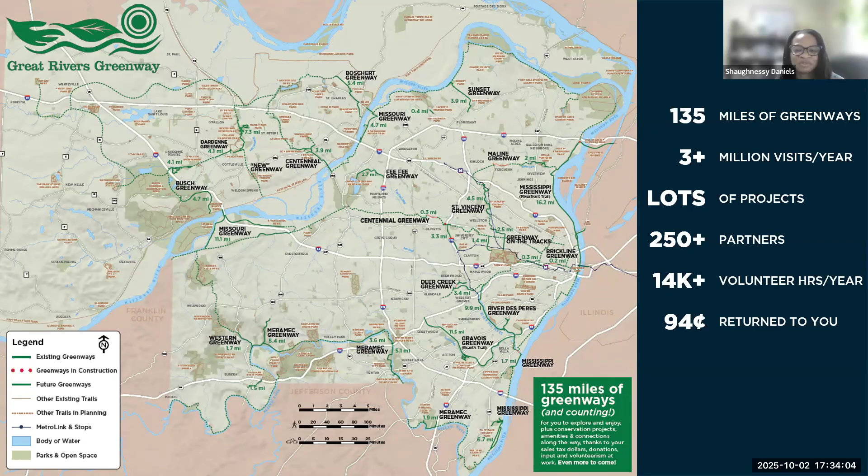This regional network includes 3 counties: St. Louis City, St. Louis County, and St. Charles County. We have 19 active greenways, including the Hodiamont Greenway, which we will just claim that now, and more than 135 miles of trails to explore in the 3-county region.

About the Hodiamont Tracks: it spans 3.5 miles, intersects 7 St. Louis City neighborhoods and 3 wards, including wards 10, 11, and 12. Once built, the Hodiamont Greenway will connect 2 other greenways. They'll connect with the St. Vincent Greenway, which currently travels through the Ruth Porter Mall, and the Brickline Greenway, which is coming soon, which will be built along Spring Avenue, where the Hodiamont Greenway will terminate on the east end.

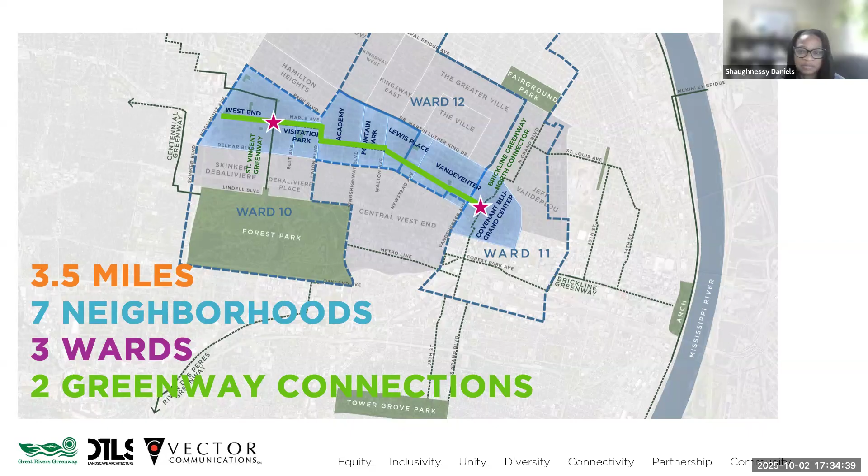And this is your project team for this planning effort. The project team includes Kuleya Bruce, the lead project manager for Great Rivers Greenway. Kuleya is supported by Gil Thomas, who is also a project manager for GRG. I serve as the civic engagement manager for this project. We are fortunate to work with DTLS's Matt Snelling, who's the design lead, as well as an elite team of engagement professionals, Darby Latham and James White.

And we are the team spearheading this effort. Together, we're the group working to make certain that we have the opportunity to come to you tonight and at all of our activities to make sure you're involved. You'll likely see us out and about in the neighborhood from time to time as we continue to work on plans for the Hodiamont Greenway and engage the community around this project. So if you see any of us, be sure to say hey.

A little context and history about the Hodiamont Tracks and how this project came to be. The Hodiamont Tracks have been an important transportation corridor between St. Louis and Florissant, used in many ways since the 1850s. It was the first path for horse-drawn transportation until the late 1880s, when it became a cable car line. It eventually evolved into an electric streetcar line, which operated for more than 70 years, and this was the last streetcar line service in St. Louis City. In the mid-1960s, the corridor was used as a bus line, operated by Bi-State for Metro bus service until 2009.

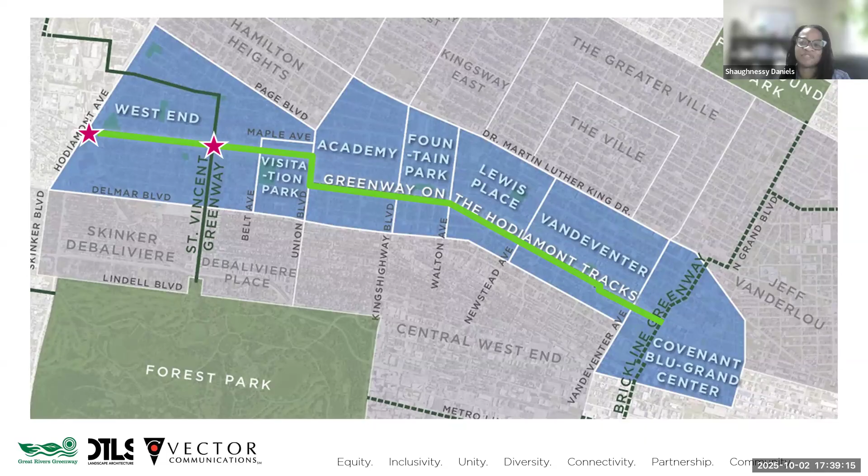We have 2 phases that are currently underway. Those phases include this first phase, Gwen Giles Park at Hodiamont Ave in the West End neighborhood. Design for this project was completed this spring and will go into construction this fall. But to share more about this segment, I'm going to turn the presentation over to Project Manager Kuleya Bruce.

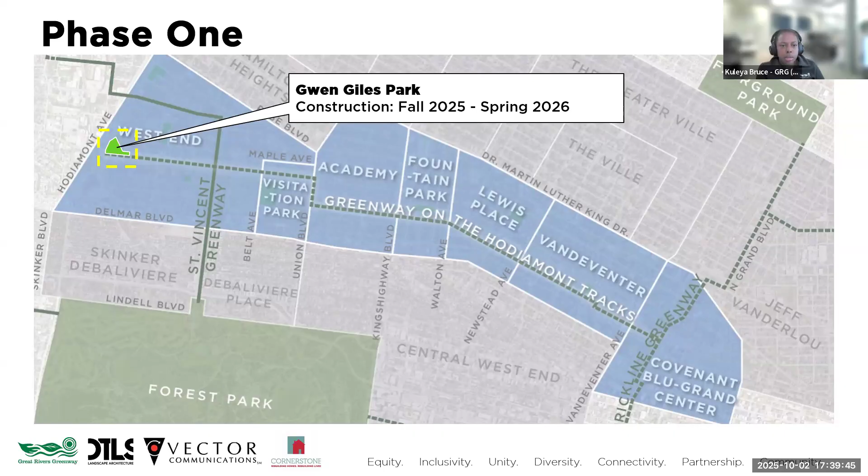So the first phase that will be constructed is the segment at Gwen Giles Park, which is at the intersection of Hodiamont Avenue and the Hodiamont tracks. You see here on the screen a bit of what improvements we will be making to the park. We are starting here because the city is also doing a cycle track along Hodiamont Avenue, and it'll be on the west side, or the north side, depending on where you are on the street.

So we're going to connect to that cycle track. That was a big component of why we wanted to start here. The other reason is because this is a city-owned park. When GRG builds and designs greenways, we typically try to operate in the right of way, but here it's municipality owned property. The park is owned by the city, which gives us the rights to modify and develop that land.

As you can see here, some of the improvements include a designed crossing for pedestrian and trail users to connect to the cycle track. We worked with Alderperson Shameem to install stop signs at this intersection. We understood from the community that there is some higher speed traffic in this area, so we've been working with the community and the Alderperson to install those stop signs.

Within the design, DTLS is also the designer on this phase. They've included some parking in this area, some low plantings, and signage. We were able to work with Cornerstone CDC, who acquired a grant for this segment, and we were able to add a pavilion. Some of the other amenities include a bike fix-it station, drinking fountain, and bottle fill station.

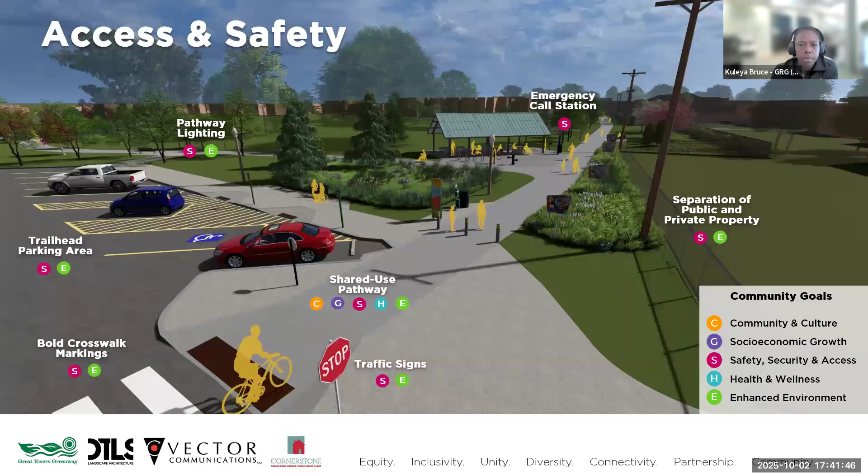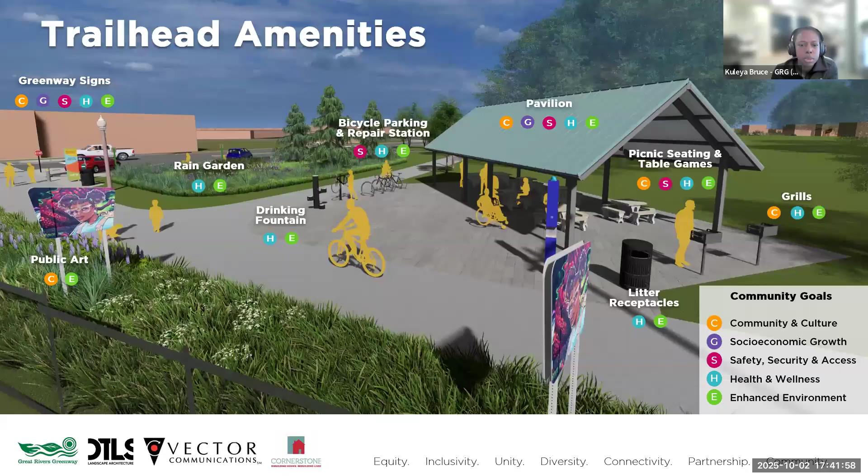We were also fortunate enough on this segment to incorporate a little bit of art and color, so those panels you see have some graphic art on them. In addition to the pavilion, we're going to be working with the St. Louis Chess Club in Central West End. They're going to provide tables with chess boards on them, donating those, and they'll also help program the space, teaching chess in this location.

We'll also have waste receptacles. We're working with the Parks Department to incorporate a couple of grills, and you can see there are also some bike parking areas.

The last thing I wanted to mention is that there's already an existing cycle walking path that goes around the park, and we will be enhancing that so that it's unified and connected to the Greenway.

I'm just going to go back real quickly and see if I can—oh, if you stop there, actually, yeah.

I know I've had a couple questions about this because during our design process we discovered that there was an area just to the south of the Hodiamont tracks that is actually owned by the city. We worked with city forestry to remove, yes, right there where Shaughnessy is showing her cursor, we worked with the city forestry department to get rid of the fence that separated that area. It had gotten overgrown because I don't think some people realized whose responsibility it was to take care of. So we will actually be expanding the park into that area, and that'll now be incorporated into the park. So we did clear that out.

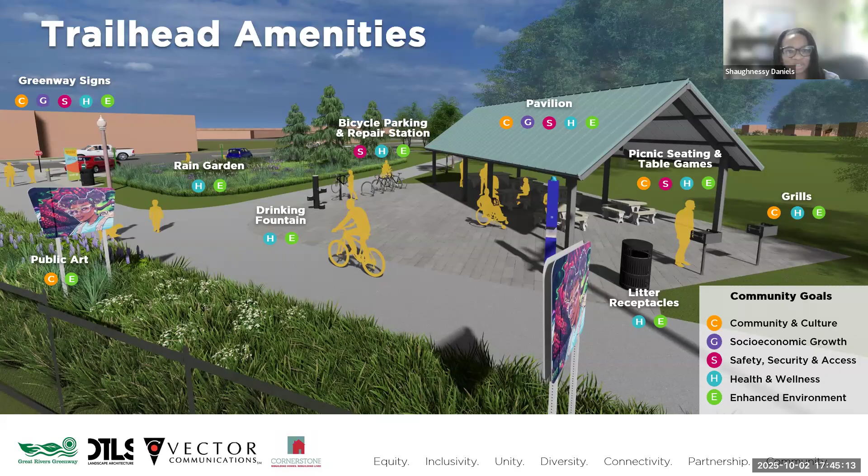One quick note about the art shown here: these are placeholders, so there will be other actual art developed. As Kuleya said, it's definitely something incorporated into the project, and we'll be working on a process to identify what the art is and who the artist is.

I wanted to add one more thing. I didn't speak to the colored dots you see in a lot of these images. As Shaughnessy mentioned, everything we do is to make sure we're listening and responding to your comments and feedback. Early on, going back in the engagement life cycle, we did some engagement and understood the priorities of the community, and that's what those dots represent: those community goals - community and culture, socioeconomic growth, safety, security, access, health and wellness, and enhanced environment. DTLS and Matt were great in trying to label some of the amenities addressing those comments. I forgot to mention that earlier, but that's where those come from.

Thank you. This is super exciting. It's exciting that after 7+ years, we're finally getting to a point where this is happening. It's coming to life. We're going to see it very soon - you'll start to see construction happening soon. Again, all of these features were identified through community engagement efforts and feedback, and this all informed the amenities for this project. I'm probably going to say thank you a billion times - we do appreciate all of the work you all have done to bring this vision to life.

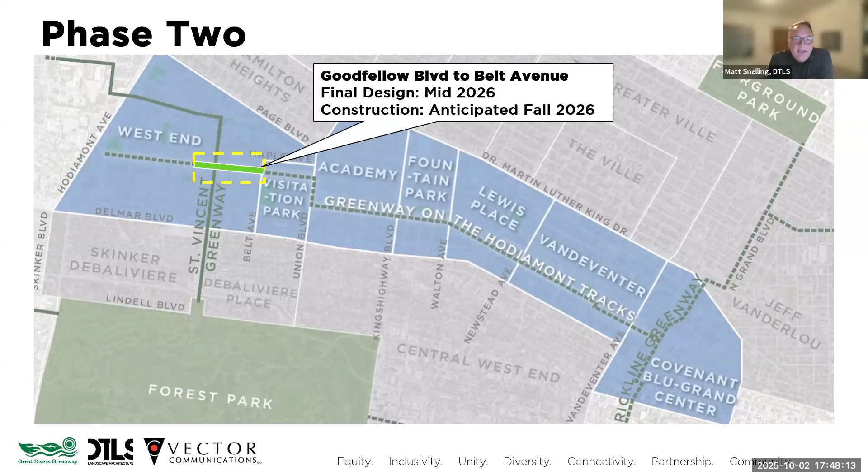Now I'm going to give a little tour of our project area. This is an overview of the project area from above - north is up on our slide. The project area is highlighted by the yellow outline, and as Kalia and Shaughnessy mentioned, this segment will extend from the east side of Goodfellow to the east side of Belt, and it will include the street crossing at Belt. The Hodiamont Greenway will also intersect the St. Vincent Greenway at Ruth Porter Mall - something Shaughnessy highlighted earlier as well. You can see it kind of in the middle of our screen here.

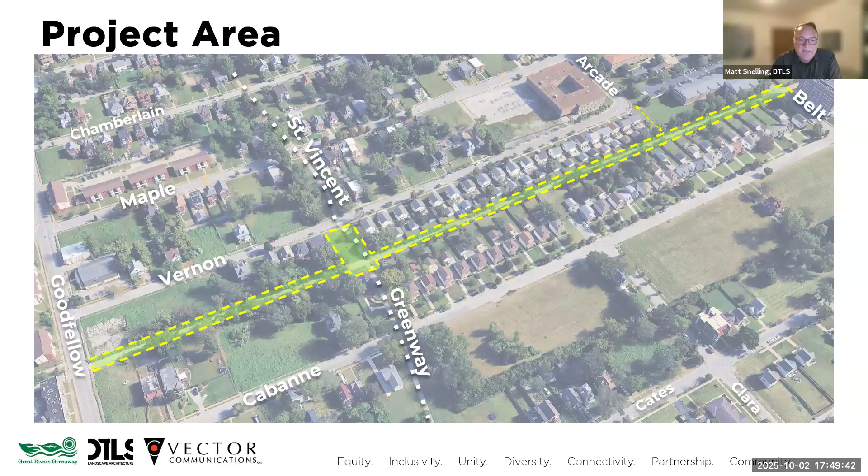On the next slide, we transition from the real world to this model view of the project, and we're going to use this model to discuss the preliminary design as we go through the next few slides.

Starting from the west, where the little arrow is. So you can skip to the next.

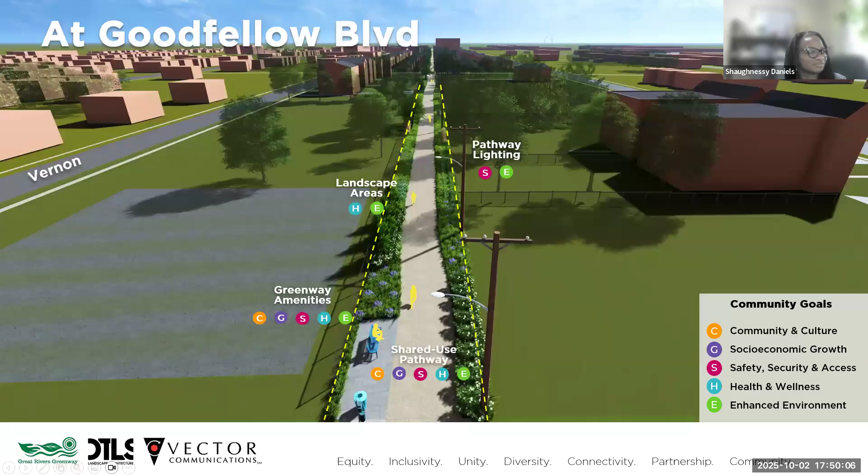And while you're transitioning slides, Matt, I just want to clarify that the old Hodiamont streetcar bus route is what's going to be used for the planned Greenway. Mm-hmm.

Yeah, thanks, Darby. So this view is standing, or we're hovering above Goodfellow and looking east. And those old Hodiamont tracks, the streetcar right-of-way you described, is the area between the yellow dashed lines here in the middle of our screen.

So, sorry, my dog's barking now.

The project area is owned primarily in this area by the St. Louis Land Clearance for Redevelopment Authority, or LCRA. It also includes a little bit of city parkland and some public street right-of-way when we get to Belt. But there is no privately owned land included in this project.

Some of the elements you can see in this view are a 12 to 14 foot wide concrete pathway, which provides a smooth surface for people walking or riding bikes or using wheelchairs or strollers. Greenway amenities like benches, waste cans, and other furnishings are shown to the left side in this view. And the pathway is lined with landscaped areas and lighting. These are items that the community has indicated are important.

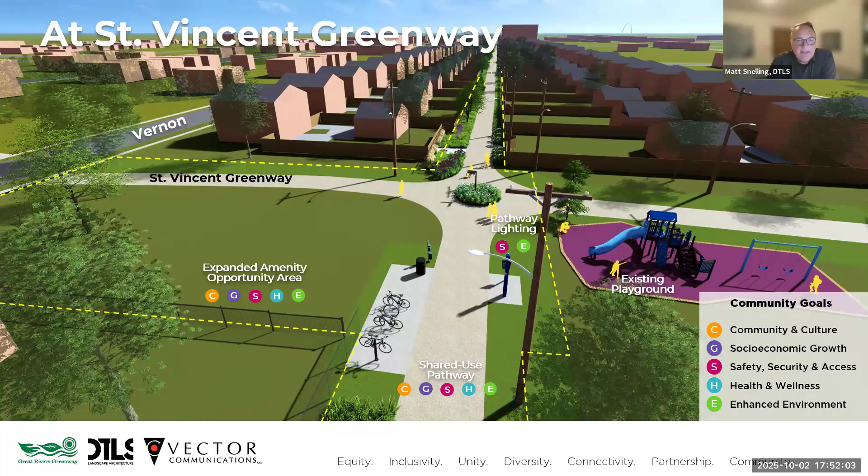Moving on to the next slide, this view shows the intersection with the existing St. Vincent Greenway. St. Vincent connects to Forest Park on the south and to Trojan Park, Wellston, Pagedale, and St. Vincent County Park to the north.

You'll notice that our project area expands quite a bit here in the center of our screen. This is an area located within Ruth Porter Mall, and north of the new Hodiamont Greenway on the left side of the screen, there's this area that could be a great place for additional greenway or park amenities that would add to and support the existing playground on the right-hand side of the screen.

A little later in the presentation, Shaughnessy will explain how you can help determine what kind of features might work best here.

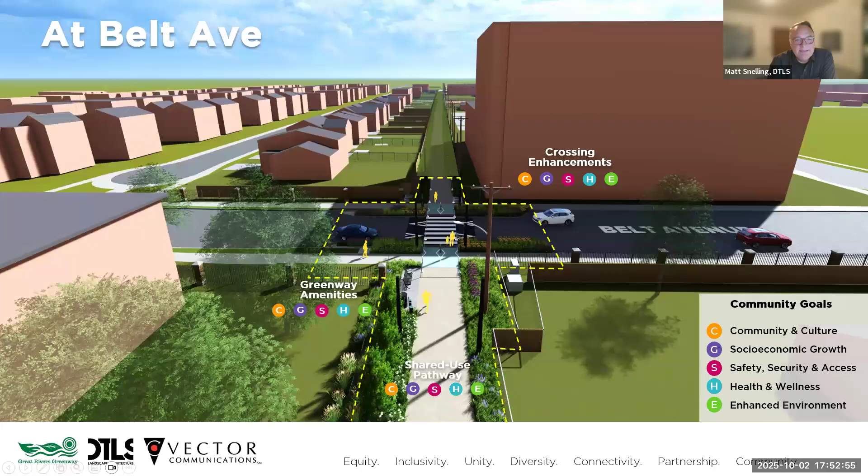The next slide brings us to the end of our tour, almost to the end, where we wrap up at Belt Avenue and cross Belt Avenue. We can just skip ahead to the next slide and look at this crossing in more detail.

Some of those improvements include bold crosswalk markings and traffic signs to alert drivers to the presence of people in the crosswalk. And the crosswalk itself is raised, like an oversized speed hump.

There's actually been, since this preliminary plan was developed, some speed humps installed on Belt to the north and south of this location.

Curb extensions or bump outs help to reduce the lane widths as you approach the crossing. This encourages drivers to slow down, but it also reduces the crossing distance for people crossing the street, and makes it easier for those folks to see around parked cars before they start out into the street.

Special lighting will ensure that people using the greenway are clearly visible to drivers and create kind of a gateway or a festive entry point to the greenway at this location. Vehicle barriers or bollards are placed on the greenway to keep cars from driving on the path.

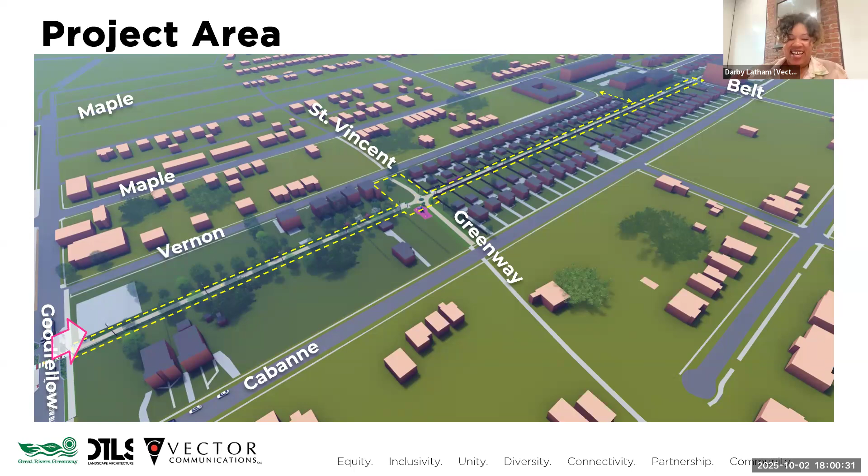Thanks, Kalia. Speaking of replacing things with something equal or better, we have another question: will the existing vegetation on both sides of the planned Greenway area be removed and replaced with new vegetation and landscaping? Do you want to take that?

Most of the vegetation that you see along this area is on private property. As I mentioned previously, our work is between the yellow lines here, which is on public property. So we don't have the ability to go in and remove that vegetation in someone's backyard. The vegetation shown in this view doesn't really reflect the reality of what's out there - it's much more dense on the outside of this yellow line than what's shown here. But the green areas between the yellow lines, that's new vegetation, new plantings that would be part of the greenway.

GRG will be responsible for maintaining that growth on the outside of the yellow line as it crosses. So if there's a tree or weeds overhanging into the greenway area, those would be pruned back along that yellow line.

Matt, can you remind us how many feet across this cross section is currently, and how wide the greenway is, just to give people perspective? In this area it's going to be between 25 and 30 feet wide between the yellow lines. The greenway pathway itself is 12 or 14 feet, so about half of that width. The other half would be planted areas primarily.

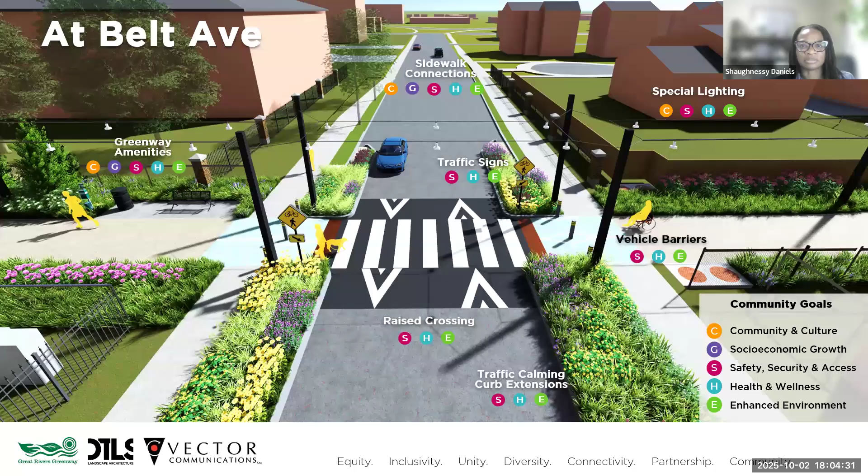Okay, so onto the design schedule. I want to thank both Kalia and Matt for your updates and the progress on the project. Let's talk a little bit about community engagement.

We've been engaging for more than 7 years. It gets a little quiet sometimes, and then we come back. So we're re-engaging with neighbors, particularly those in the footprint between Goodfellow and Belt, because we want to hear from you all and learn from you all. We also want to hear from neighbors in the West End generally, since you have two projects happening right now that are really flanking the West End. We appreciate you, but we definitely need to hear from you.

You may have gotten a knock on your door recently, or seen us at a neighborhood association meeting. You may have received an email from me or from Darby, or seen a social media post or us at pop-up events. We were at the recent Cornerstone event in early August, and we did a volunteer cleanup event on September 20th, just a couple weeks ago. We were on the tracks — forestry came in and took away a lot of vegetation, and then volunteers came out and helped clean that up. Hopefully you all saw some of that improvement.

We also launched an online survey a couple weeks back. It's open now through October 28th. There's a QR code here if you feel like scanning it, or you can visit the Hodiamont Tracks website. We need your input — we need you to take the survey, share your concerns, and tell us what looks great and what you don't like. We need to hear all of that. If you haven't taken the survey, please scan the QR code on the screen. If you have taken it, thank you — now tell a neighbor, tell a friend, tell an associate, send it to your networks, and encourage them to take the survey also. We'd really appreciate your feedback.

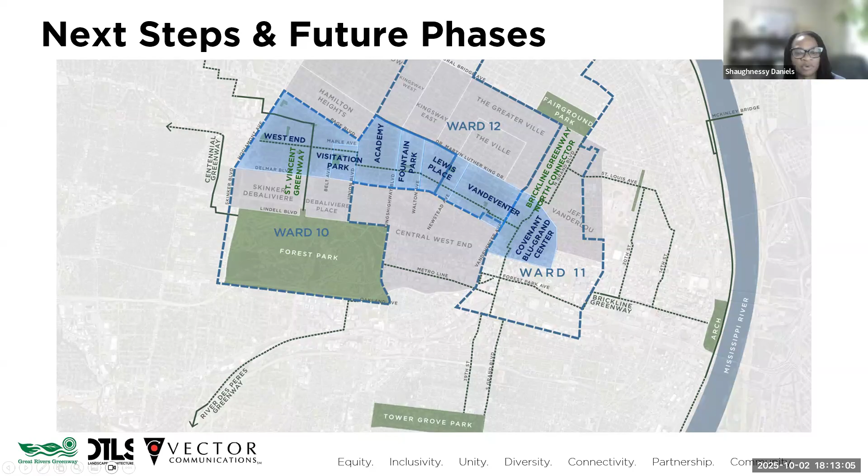All right, really quick, I'm going to talk about next steps and future phases. We are actively pursuing grants and other opportunities to fund other segments of the Hodiamont Greenway so we can continue implementation of this project. We've got those two projects happening now that are bookending the West End, but we're looking for opportunities to start filling in gaps and also further move down the tracks. This is a long-term effort—it's been long-term because we've been working at this through engagement for at least seven years of planning and design. But we're going to continue to work with our partners at the city, at Bi-State, and others to move this project forward. So be on the lookout for more news and information about upcoming segments.